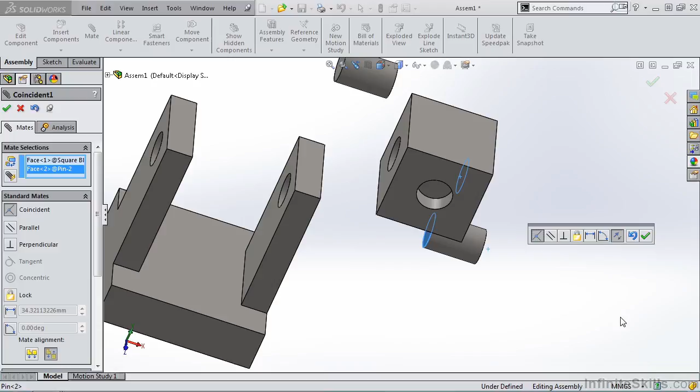Let's go out to the screen, and say we would like to mate this pin with this hole in the square block. We want this face of the pin to be flush with the back face of the hole. So I'm going to select that back face, and notice it appears in the window for the Property Manager. I'll rotate the assembly, select this face. Once I select the two faces, notice in the Property Manager the coincident mate is highlighted. Obviously I can select a different one. I also have a pop-up toolbar, so you don't have to move your mouse all the way across the screen to make changes. I do like the coincident mate, so I'm going to select the green check mark.

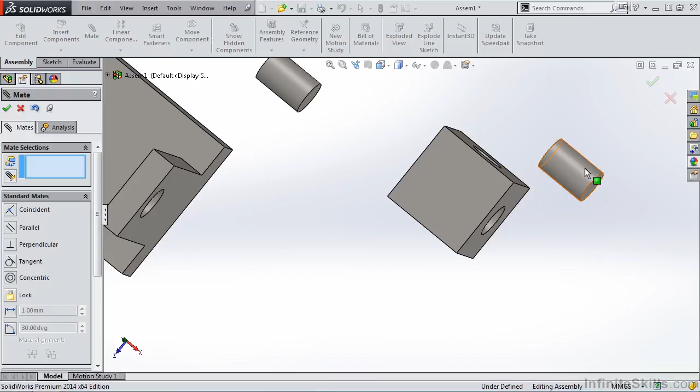Now, as soon as I apply that coincident mate and go to move the pin, notice both parts are moving, and at first look it may appear the coincident mate did not take. However, if we look at it from a top view, let's roll it just a little bit more, you will see that the coincident mate did take. However, it looks like we need to add additional mates. Now we'd like to center this pin in this hole feature.

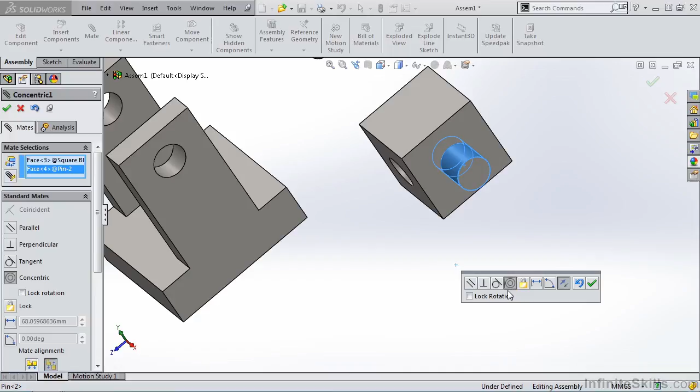Looking at the standard mates, that would be the concentric mate. So I'm going to select the hole in the part, along with the outside of that cylinder. The concentric mate is highlighted, and then I'll select the green check mark. Now, when I go to move the pin, the two parts move together.

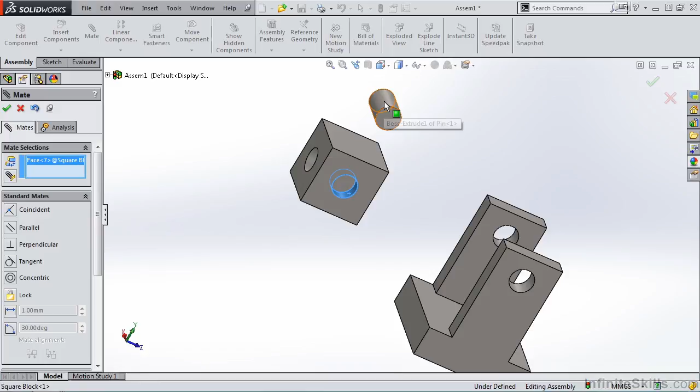Now let's do the same for the second pin. I'll select this face, along with this face, apply the coincident, and then select the surface here, along with this surface, apply the concentric, and now notice those three parts move as one.

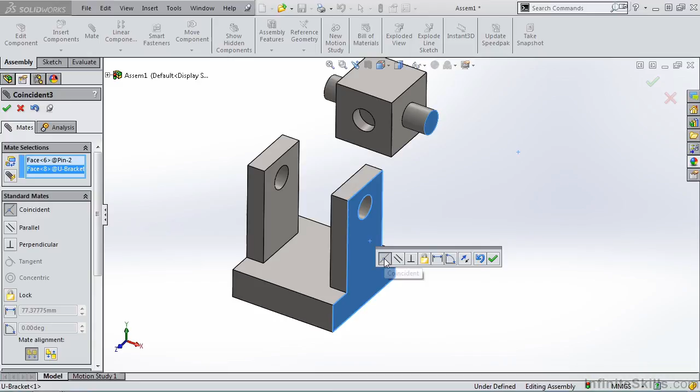Now let's apply a couple more mates to mate these three pieces to the U-bracket. I'll start by selecting this outside face of the pin and the outside face of the U-bracket and applying a coincident mate. I'll then apply a concentric mate and accept it. Notice if I close out of the Mate Property Manager, the block can rotate. Now you may want to have that rotation.

However, if not, you can simply add a parallel mate between this face along with this top face. Accept it by clicking the green check mark, and now we have a parallel mate between those two faces, and the block no longer rotates.

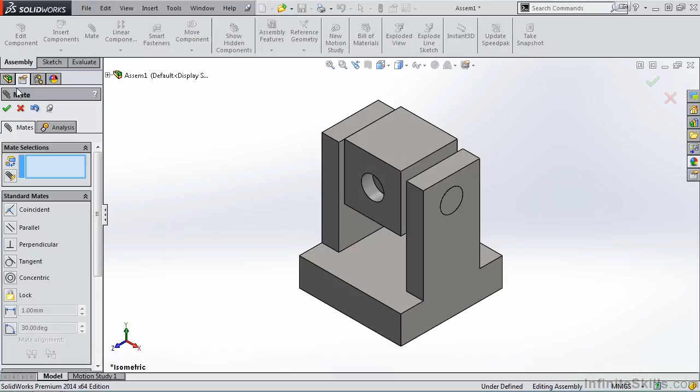Now if I close out of the Mate Property Manager, I do want you to notice that we have a mates listing in the Feature Manager design tree. If we expand it, these are all of the mates that we just applied.

Now, at a later time, if you would like to be able to rotate this square block, there is no need to delete the parallel mate. You can simply suppress it. Suppressing the parallel mate grays it out in the Feature Manager design tree. When you go back out to the assembly, you'll notice it now rotates.